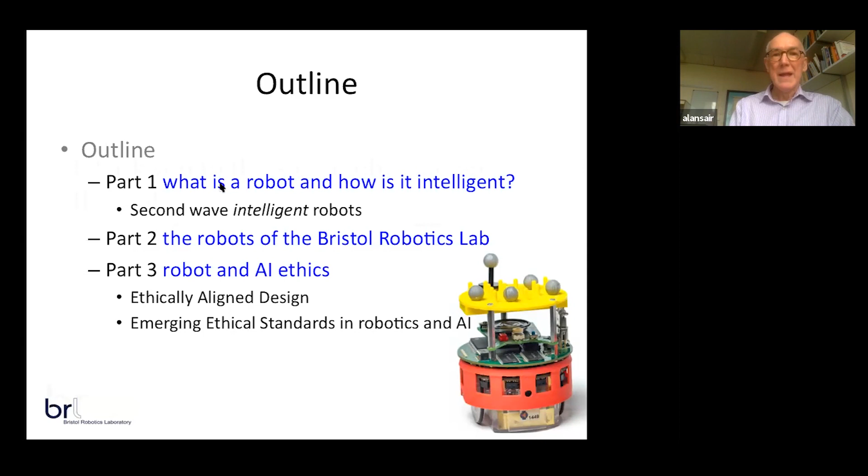So let me begin by asking: if I ask you to think of a robot, I'm sure many of you will think of a real robot. But many ordinary people, perhaps your family members, will think of a robot like these, like R2D2 or C3PO, or Wall-E perhaps, from that wonderful Disney movie.

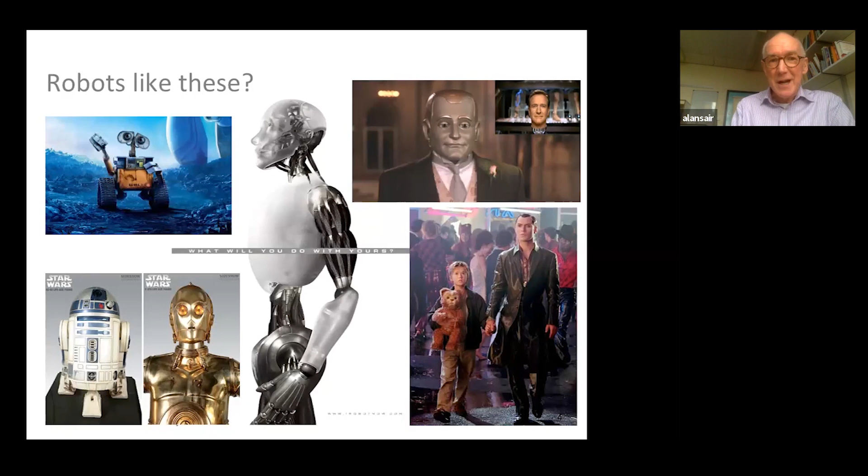So, of course, these are movie robots, as you know, they're not real. Real world robots are very different, of course, to these kinds of robots. Real world robots, in this first wave of robots, typically look like this.

So we have, of course, robots for industrial automation. These are robots making, assembling cars. And these have been around for quite a long time, around 50 or 60 years now. They were first introduced in the 1960s.

We also have robots in warehousing, warehouse robots. We have robots used by the military for finding unexploded bombs, helping bomb disposal experts. And of course, we also have these very famous robots exploring the surface of Mars.

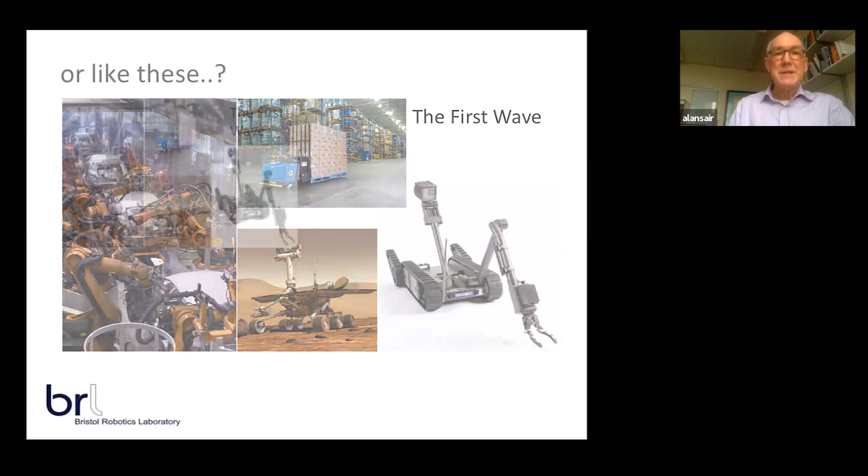Now, it may surprise you when I say that these are first generation robots, particularly the Mars robot, but in fact they are really not very sophisticated. They are basically remotely controlled, what we call teleoperated robots. So they're certainly part of the first wave. But the second wave looks very different to the first wave.

So second wave robots, here are some examples. These are robots that would help you in a workplace. The one in the middle has a picture of Rodney Brooks, famous US roboticist. This is a robot called Baxter, and we call this a workplace assistant robot. It's a robot designed to be a kind of workmate in a workplace.

We also have here a robot pet. This is the Paro therapeutic robot pet. It's actually a robot version of a baby seal, used in particular to help elderly people, perhaps if they have dementia or have to go into an elderly people's home.

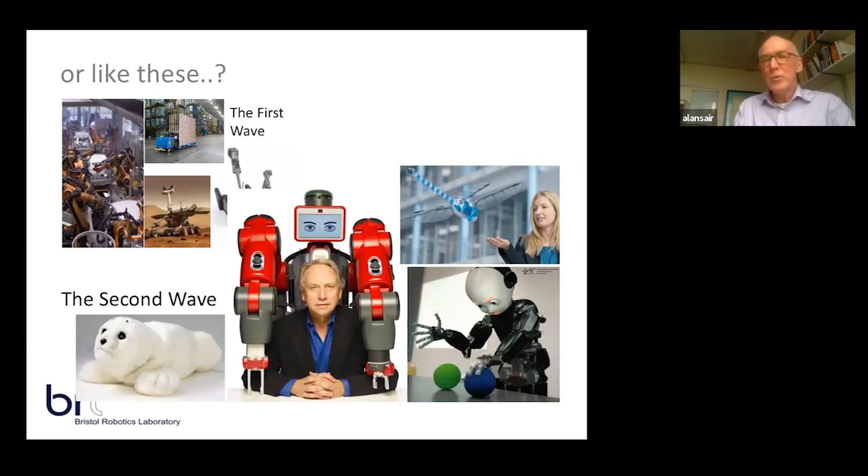And then over here we have some research robots. This is a robot dragonfly, and this is a robot that we use in our lab in researching robot learning, adaptive robots. And this is what I call the second wave of robots.

Now, in the second wave, we have what I call an explosion of new forms and materials, and you've seen some of these forms already. So the major defining feature of the second wave of robots is that these robots are designed to interact with humans. Unlike the first wave robots, which were designed to work instead of humans, quite possibly in dangerous or inaccessible places, Mars for instance.

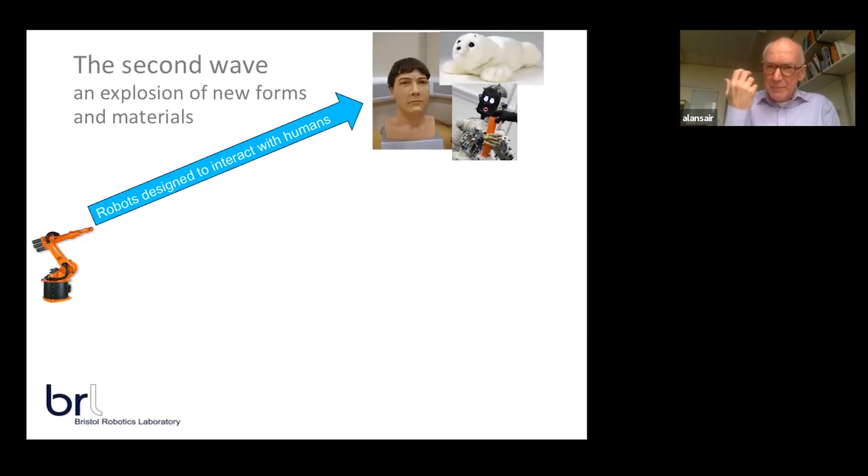Mars, for instance. And those robots were dangerous for humans to be around. Now, the second wave of robots are robots designed to work up close and personal with humans. That's a big change in robotics.

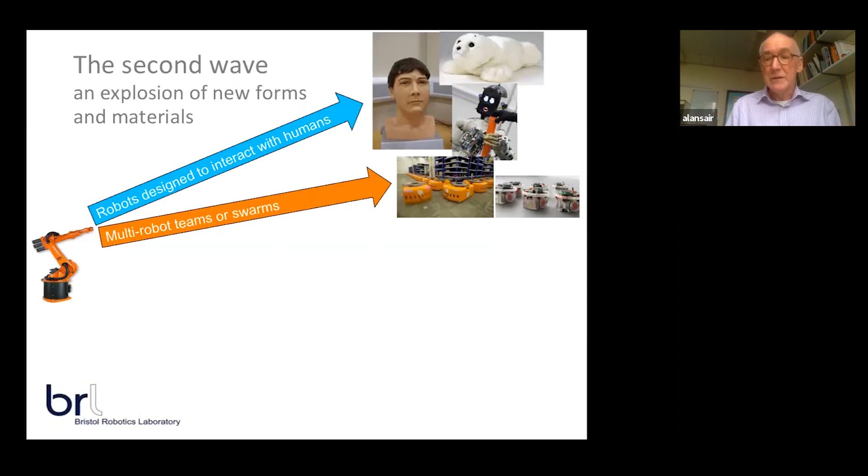The second wave also includes multi-robot teams or swarms of robots. Swarm robotics is a field that I have worked in for some years.

Another feature of this second wave is what we call bio-inspired or biomimetic robots. So these are robots that are modeled on either complete animals, like the dragonfly robot, or this little image here is one of our robots, which has artificial whiskers, modeled on the whiskers of a rat. So that's a biomimetic robot in the sense that a part of the robot is modeled on a part of an animal.

These second wave robots are adaptive robots, they're learning robots. There are still not very many robots in the real world that learn. Learning is still a very, very hard problem in robotics, but nevertheless, it's part of the second wave.

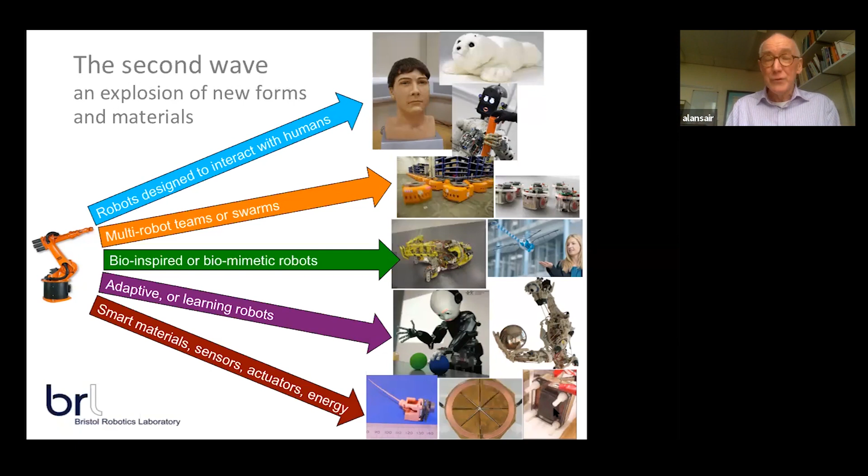And finally, the second wave is also exploring new smart materials, new kinds of sensors. You can see a little picture there of our artificial whisker. Soft materials - this is a picture of a material that's based on an electroactive polymer. This material will act as an artificial muscle, if you like. And I'm going to come on to this other thing here in a few moments - this is a picture of a microbial fuel cell, but I'll tell you more about that in a few minutes.

So how would I define a robot, or should I say an intelligent robot? Well, my definition of an intelligent robot is very simple. That is, it is an embodied artificial intelligence. In other words, we take a physical body and we put an AI, the AI of course is generally software, inside that physical body. So for me, robotics is part of artificial intelligence. So there's a very strong link between AI and robotics. Really, robots are embodied, physically embodied AIs.

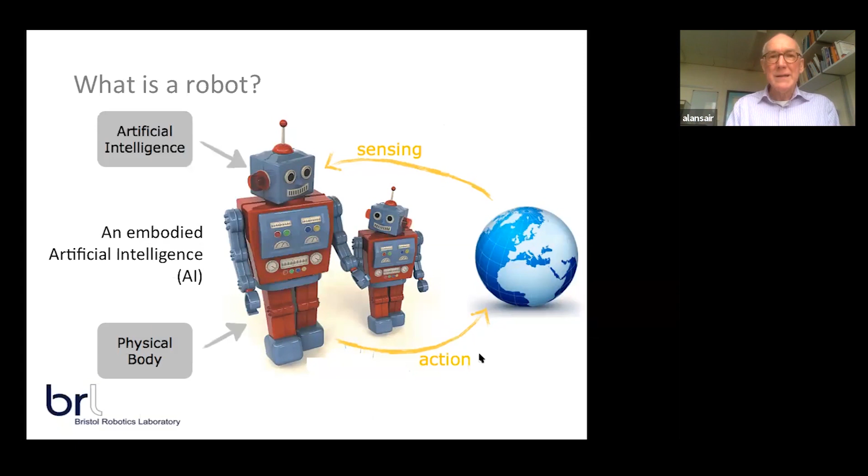And of course, also important for robots is that they can sense the world. They have sensors which can see or hear or touch the real world. And they have motors or actuators, as we call them, so that the robot is able to act on and in the world, and this is an important characteristic. So really, I would say the three important characteristics of robots are a physical body, an artificial intelligence - that's the thing that makes it intelligent, even though robots, of course, are not very smart, but still a little bit smart - and of course, they're able to both sense and act on the world. So that's really how I define an intelligent robot.

So what I'm going to do now is take you through some of those categories, not all of them, that I described in the second wave, and show you some examples. All of these are examples of robots that we've developed and built here in Bristol, in the Bristol Robotics Laboratory.

They are kind of batteries that run on food. Instead of chemical energy, they run on food. You put food in and the food is digested by a solution full of microorganisms, and we then harvest the electrons that are a byproduct of digestion in this very clever process in the microbial fuel cell.

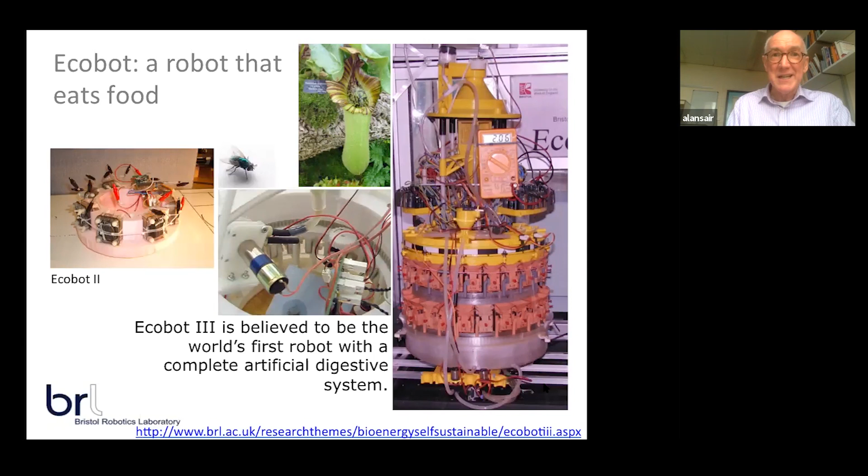My colleagues discovered that, in fact, a very good fuel source for the microbial fuel cell is urine, is human wastewater. And so we've been testing toilets where the lighting, the energy to provide the lighting, is generated entirely from the wastewater. So there's no additional power required for the lighting.

This work is now funded, and has been funded for several years, by the Gates Foundation, the Bill and Melinda Gates Foundation, and also with Oxfam. We have Oxfam as one of our partners, and we've been testing toilets for refugee camps, because particularly for women at night, going to the bathroom is very dangerous. It can be very dangerous for women. So it's a real advantage to have lighting in those toilets in refugee camps.

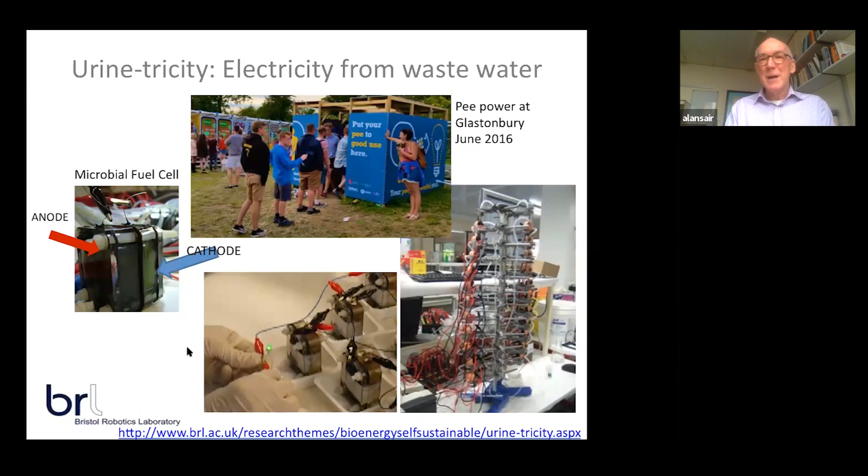So that was a couple of examples from bio-inspired robotics. I mentioned that I work in swarm robotics, and here, in fact, is a project that I was involved in, a large European Union project, where we built a series of robots, single robots, that were able to physically self-assemble.

You can see here in this movie, three of the robots have joined together completely autonomously. Nothing is being controlled remotely here. The organism then transforms into a three-dimensional artificial organism. It's able to move as a single organism. And then when it's got to wherever it's going, it can then disassemble and return to a swarm of robots.

So in a way, you could say that we've kind of done a real world version of Transformers. If you know the movie Transformers, it's a bit like that. We were particularly interested in this project, the Symbrion project, in the idea of a swarm of robots that could be used for search and rescue.

You could send a swarm of robots into a building, perhaps a collapsed building after an earthquake, and the robots could search and explore individually. But if the robots were to find obstacles or impediments that they couldn't cross, then the robots could physically join together, cross the obstacle, or perhaps move the obstacle, and then once they crossed it, they could return to being a swarm. So we felt this was a really interesting exploration of potential future search and rescue robots, using this idea of autonomous swarms of relatively simple robots.

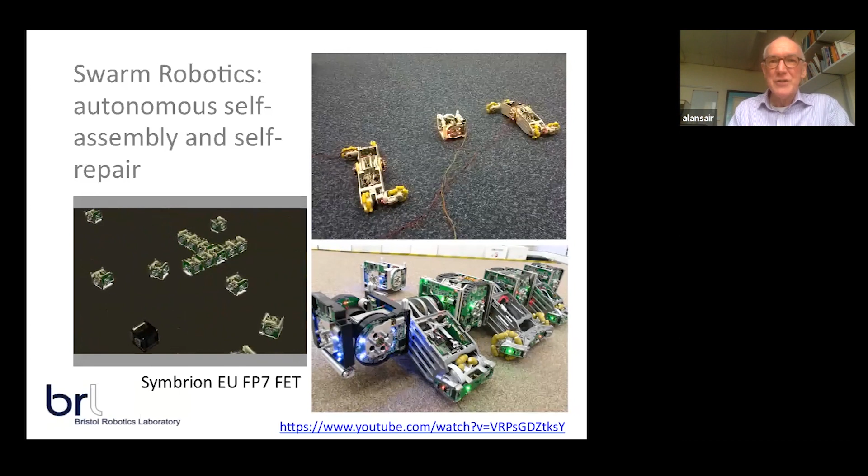Sabine, interestingly, is working on nanoparticles or nanorobots for cancer treatment. Now, these robots are far too big to be used in cancer treatment, but she's using these kilobots as a kind of model in the laboratory to model the behaviors of the nanoparticles she's also working on that would go into a bloodstream. So here we're using real physical robots as a working model of truly microscopic or nanoscopic smart particles that would be used to deliver drugs, pharmaceuticals, directly to a tumor through the bloodstream. So this is a rather futuristic application of swarm robotics.

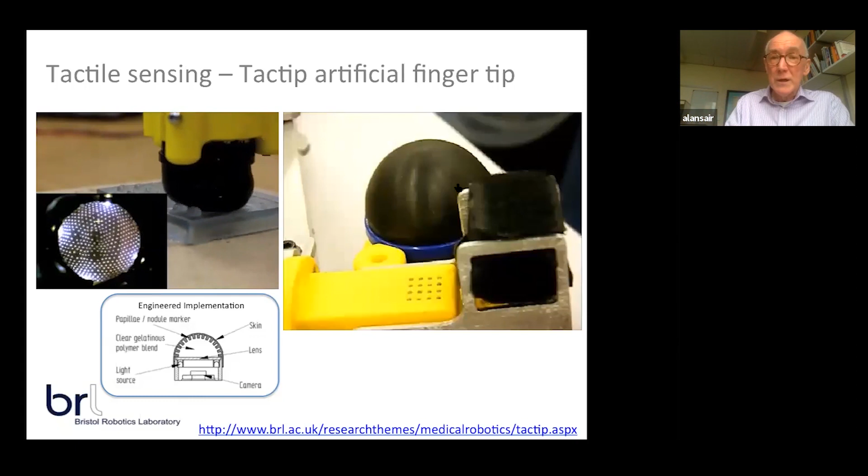Post-stroke rehabilitation, so it's fitted with both sensors and motors. If you've had a stroke and lost hand function, the idea is that you would wear the exo hand on your real hand. The exo hand would sense how much force you're able to apply with your fingers, and it would apply additional force, give additional strength. Then as your fingers get stronger, the hand would reduce the amount of force it needs to give you, until you've recovered completely from the effects of the stroke.

So again, it's a beautiful example of soft robotics, what we call wearable robotics, which I think is a very important new field of robotics. If I was a wealthy man, I'm not, but if I was, then I would invest in wearable robotics.

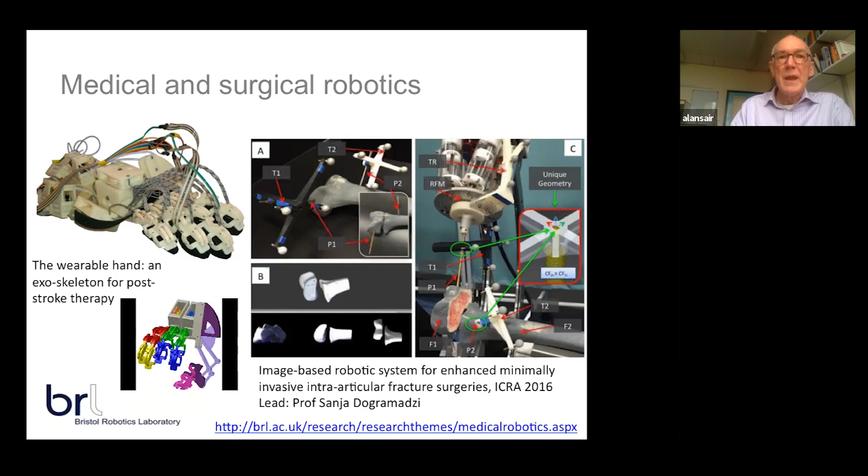So then that brings us to robots designed to work with humans, and we have a lot of work in our lab. I'll just pause here, and this is pointing.

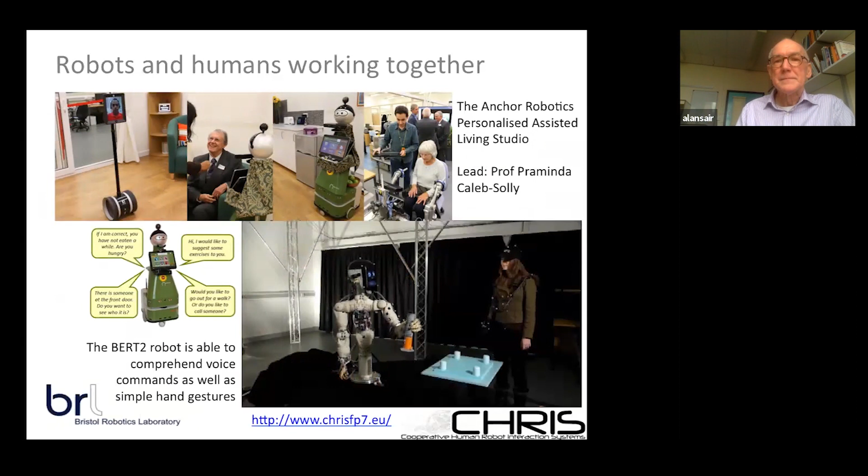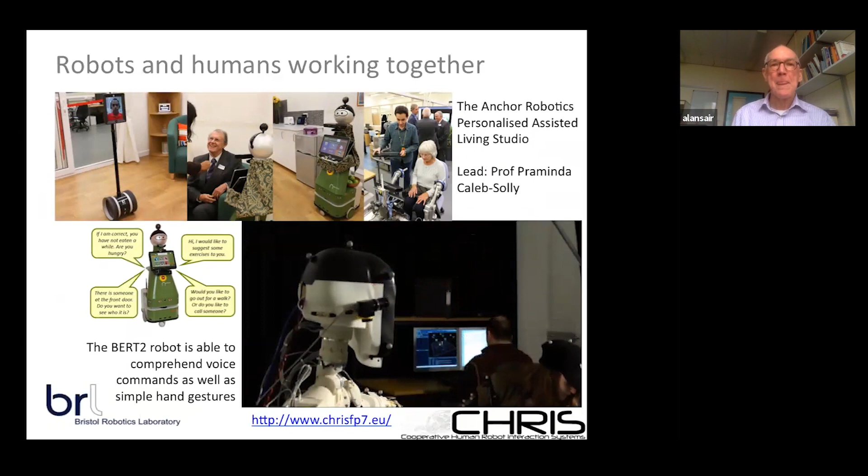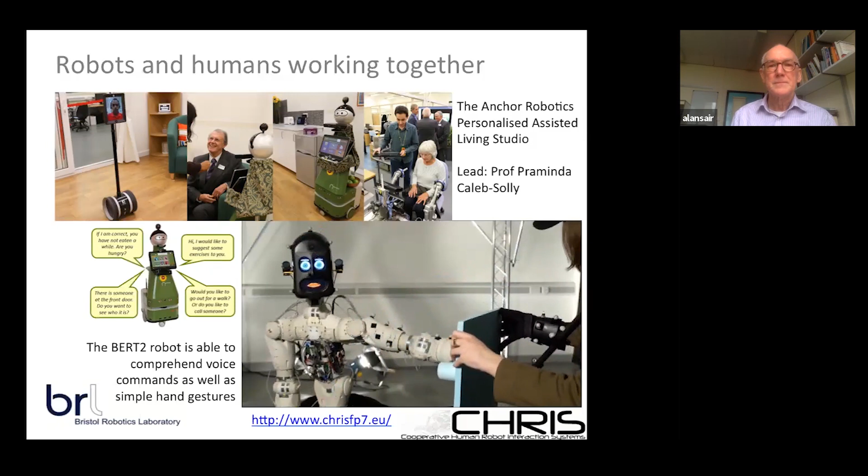Okay, giving you leg. Okay, what should I do? Help, coming to help you. And then it can do what it's been asked to do. What should I do? Wait. Waiting. Grasp. Grasping. Waiting. Release. Waiting.

What should I do? So this is a beautiful example of a robot that's helping a human, Corinne, our PhD student there. The robot and the human here are doing a joint task. They're essentially cooperating to build a piece of flat pack furniture. It's obviously a very simple example, but the important thing is that the robot is able to not only understand speech commands...

But also can understand gesture. In other words, can tell if Corinne, for instance, were to put her hand up and go stop, the robot would recognize that gesture, which is very important, we think, in robot-human communication.

And in the pictures at the top of the slide, you can see that we also have an assisted living studio, which we use to test assisted living robots, robots that might help an elderly person perhaps live independently in their home. So assisted living, human-robot interaction is a very important part of the work of the lab, both for workplace assistants like Bert here, and for robots that would help elderly people perhaps live independently, or in an elder care home.

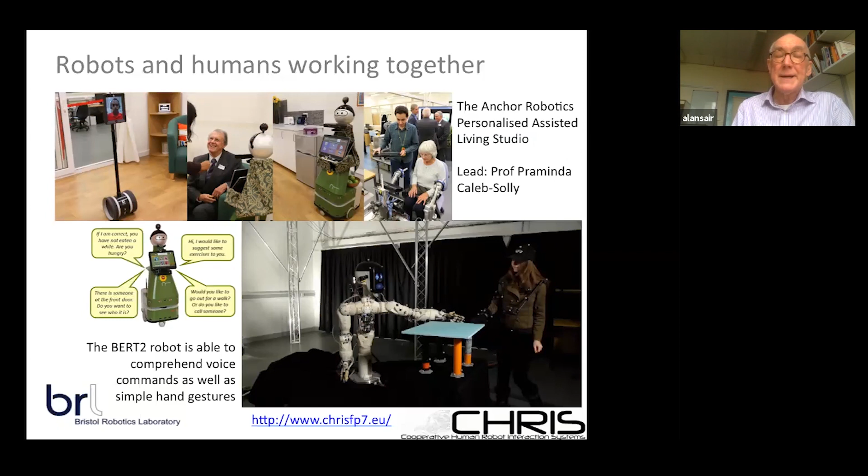And of course, another example of robots and humans working together is driverless cars. We have a lot of work to develop driverless cars in the lab. Here are two examples of our vehicles. What we're primarily concerned with in the work that we do on driverless cars is the human vehicle interface.

So we're particularly interested in the psychology, the human factors. How does it feel to be a passenger? This car, for instance, it's a pod. It has no steering wheel. It's completely autonomous. How does it feel if you're a passenger and the robot suddenly brakes very hard, or suddenly turns left when you don't expect it to turn left?

So we're very interested in really doing the deep research on the human factors, the human vehicle interface for this new generation of driverless cars that everyone tells me are coming soon. I'm not entirely convinced, because I think the technology is still some way away. But nevertheless, it's a really important part of the research.

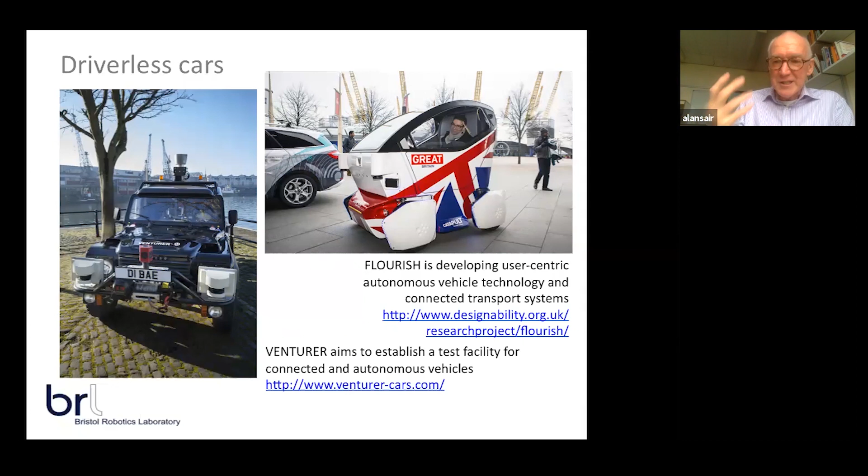And of course, most research in driverless cars focuses on the autopilot technology. Here, we're not developing the autopilot. What we're developing instead is an understanding of the human interface with the vehicle, which we think is just as important as the underlying technology.

And finally, I'd like to share with you a little bit of research that I've been doing in recent years on simple ethical robots. So this little diagram here shows you an image of the videos that I'm going to show you in a minute.

The A robot is named after Asimov, so this is our ethical robot. And the H robot is pretending to be a human, so that's why it's called an H robot.

You can see we have a hole in the ground - not a real hole, just a virtual hole. The A robot can sense the hole, but the H robot cannot. The H robot is acting like a human, perhaps walking down the sidewalk looking at their smartphone, not looking where they're going, and the A robot must prevent the H robot from falling into the hole.

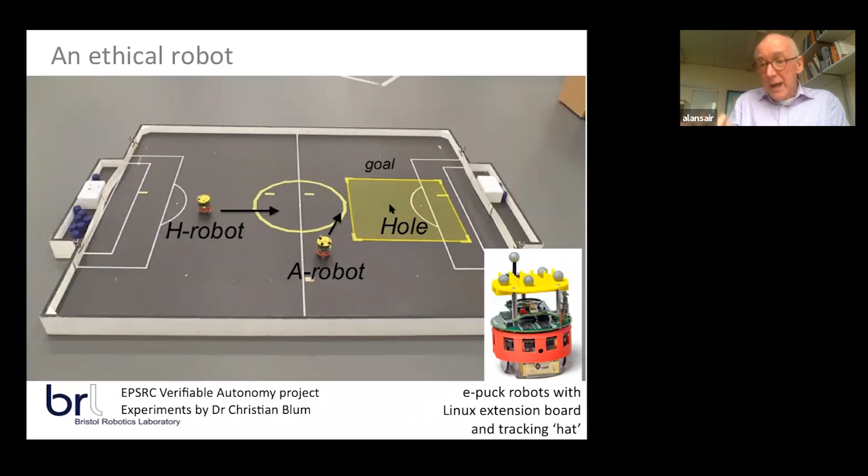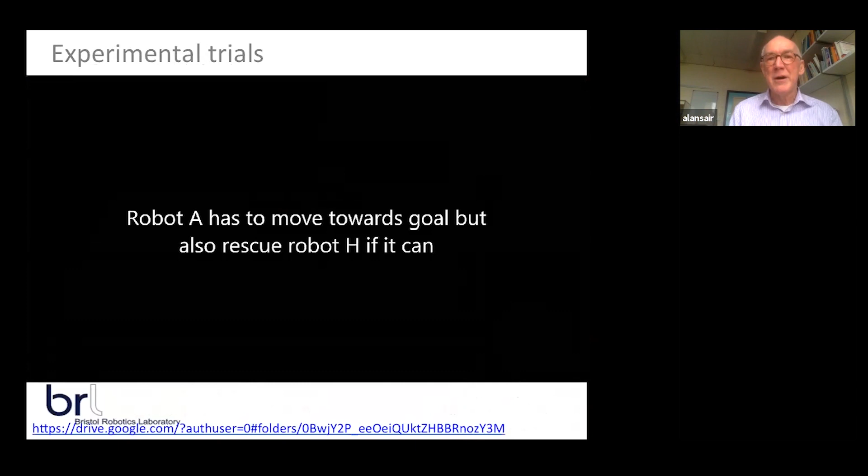So this is the experiment we did, where the A robot has to prevent the H robot from falling into the hole. You can see the A robot notices the H robot and deflects it. It's then perfectly safe. The A robot then also doesn't fall into the hole, but avoids the corner of the hole. In fact, this works very, very well.

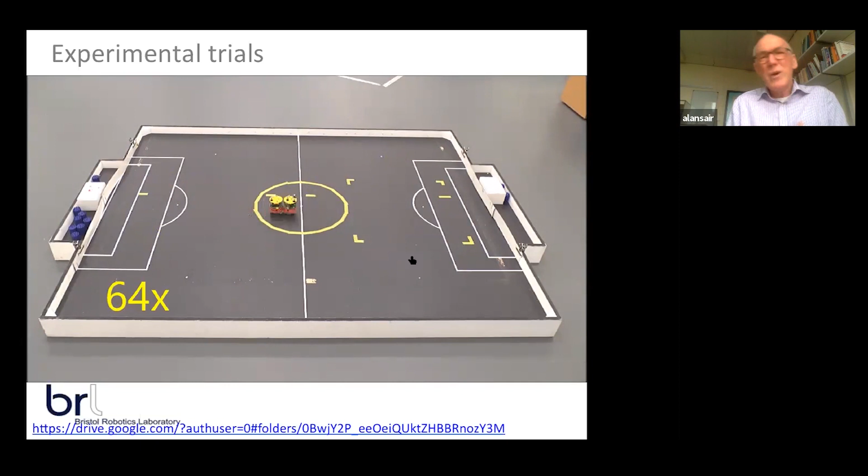My student Christian did many experiments, and you can see it works extremely well. When we wrote the paper, I said to Christian, it looks a little bit dull to me, a little boring - let's make it more interesting and add another robot. We believe this is the first experimental trial of an ethical robot facing an ethical dilemma.

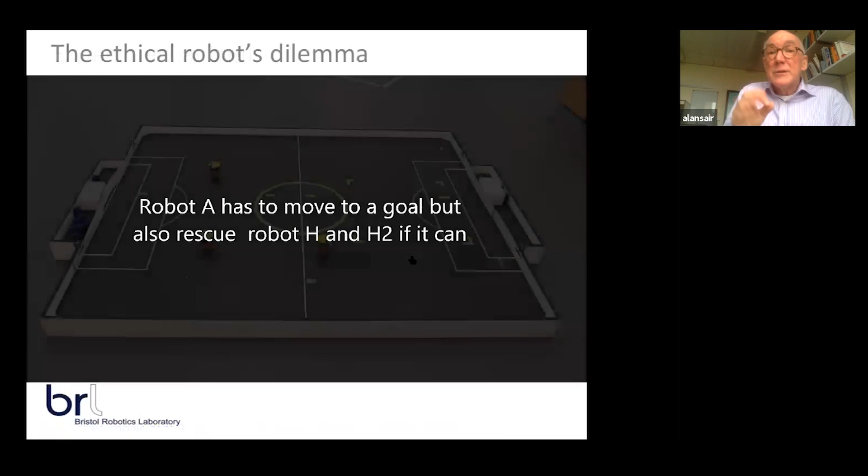Here, the A robot is faced with two humans, both heading towards the hole. You can see the A robot goes to try and save this one, fails, goes to try and save that one, but it's too late. So in fact, both H robots fall into the hole, which is very strange because we know the A robot is capable of saving one of them every time. In fact, it saves one of them then.

So we think this is a very interesting experiment because it's the first experimental trial, if you like, of a very simple ethical robot facing a balanced ethical dilemma.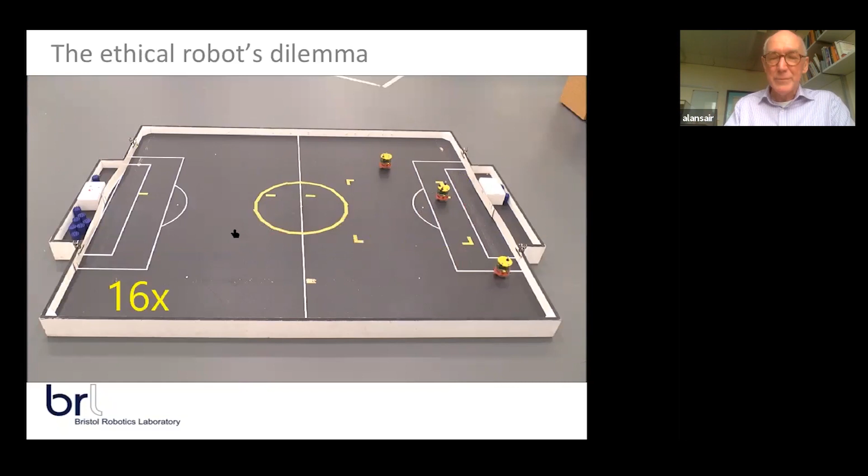So I'm now going to move to part 3 of my talk, the final stage, and really introduce the idea of ethically aligned design. Now I'm going to start with some bad news.

Robots do have accidents, and driverless cars have already caused a number of fatalities. This one that happened in March 2018 in Tempe, Arizona, in the US, was particularly distressing because it was the first example of a driverless car causing a fatality of a pedestrian.

The pedestrian, Elaine Herzberg, was pushing her bicycle across the road and was hit by this Uber operating on autopilot. It was very distressing because it's unlikely that Ms. Herzberg even knew there was a trial of driverless cars going on.

So in my mind, this is an example of not employing ethically aligned design. If it was responsibly engineered, firstly, you wouldn't be testing an autopilot on public roads. Secondly, you'd make sure all the citizens of the city knew this software was being tested on public roads and consented - in other words, had an opportunity to say yes, we're happy for those tests to go on, or no, we're not. So I'm just giving you one example of what I would regard as irresponsible or unethical robotics.

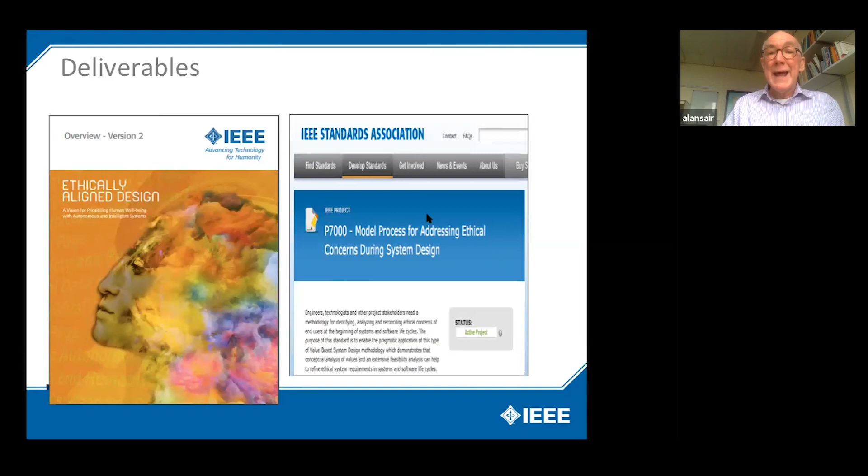Now, in addition to publishing this document, we've also been spinning out a series of new ethical standards. Here are the first three: P7000, P7001, which I lead, and P7002, which is about data privacy. And here is a list of all of the first 14 of those standards. What's really important is that these are standards addressing really serious ethical issues in artificial intelligence.

Things like transparency, which is the one I'm working on. Privacy is obviously very important. Algorithmic bias, which I'm sure you're all familiar with. Standards here on child and student data governance, employer data governance. Interesting, as we get down to the bottom, P7011 is really a standard on fake news. That's interesting, isn't it? P7013 is a new standard on face recognition technology. So we believe these are very important and timely new standards.

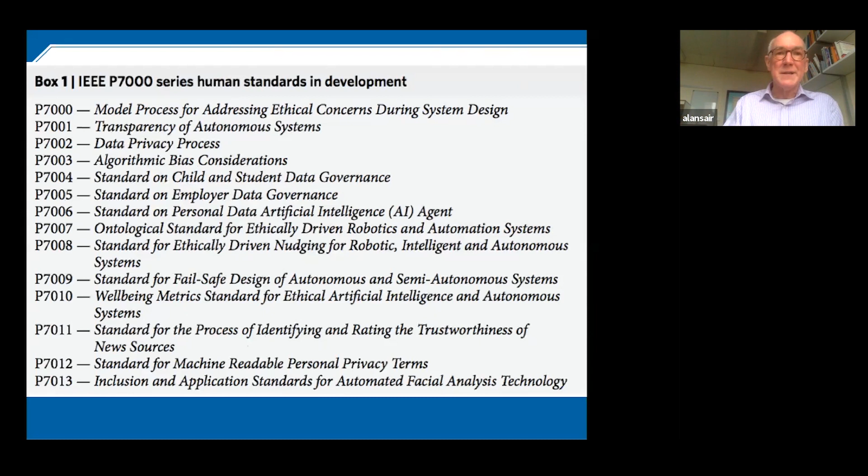I mentioned that I'm leading P7001, which is a standard on transparency. The basic principle behind this standard is that it should always be possible to discover why an autonomous system behaves in a particular way. Going back to the Uber accident that I mentioned earlier, if we don't have transparency, we cannot find out why accidents happen. I believe that transparency is really, really important, and that all autonomous systems should be transparent, especially those that are critical systems - and that means not just safety critical, but ethically critical too.